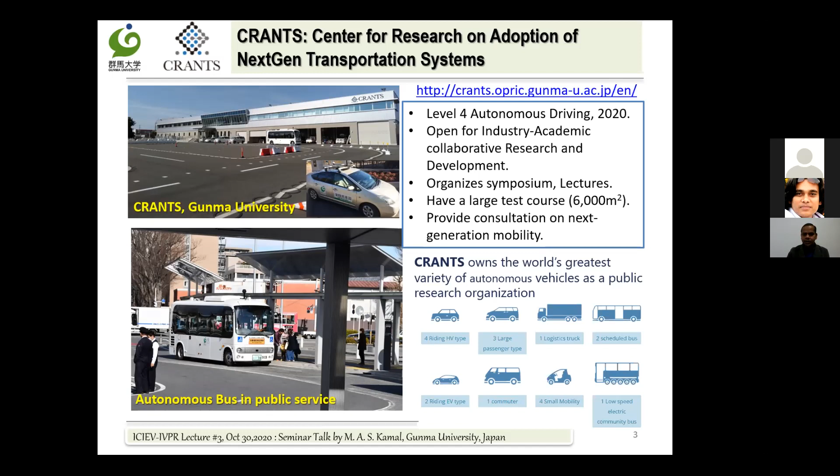And you see here, we are also having some pilot projects in different cities of Japan, where autonomous buses are transporting public people from one place to another in a real experiment service. So this is where I'm working. I joined Gunma University just 1.5 years ago, and I am collaborating with this center as well.

Anyhow, let's move to the main topic on transportation. What are the problems in our existing road transportation system? I have about 65 slides, so I pick up from here and there, but I will explain some parts for those who are interested to work in this area, and mainly some results, and finish my work in around 40-45 minutes. So anyhow, road transportation is a complex system.

Why a complex system? There are various independent elements, like each car is an element, a traffic signal is an element. If we see the road network, various types of vehicles and various types of behavior among the vehicles all make it very complex. We cannot model it, we cannot predict it perfectly. So this is a very complex system, and at this modern age of science, even we cannot prevent these kinds of problems: accidents, emission, extra cost of fuel consumption.

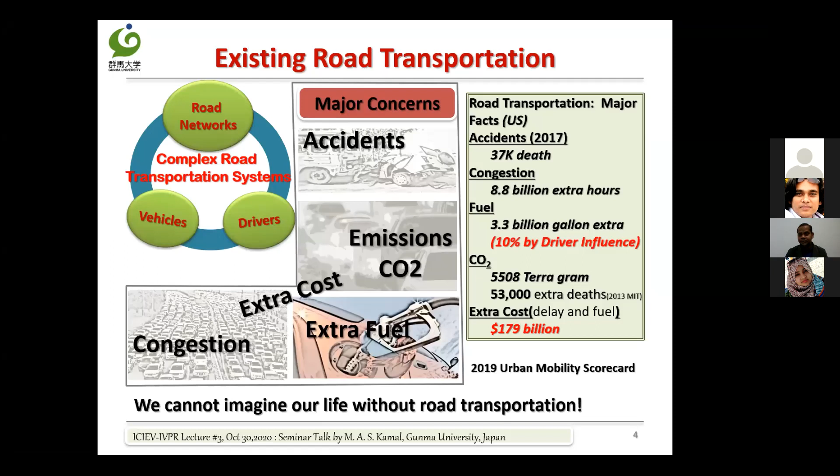So now, why can we not reduce these things, accidents, emission, or congestion? The problem is the human driver. Almost 100% of vehicles are controlled by human drivers, and they have limitations in sensing and reacting, and even some psychological factors. Some drivers want to drive aggressively, so it's not about limitation. I think this is the major reason we are having this problem. How can we overcome this? Researchers have been working on this field always, but so far not much improvement.

So let's see what intelligent transportation systems, ITS, are going to introduce that is new: the connected vehicle environment. The vehicles will communicate with each other so that they can share information with each other. This is called the connected vehicle environment. And autonomous driving vehicles. You see, this is one of the vehicles of my university.

So if the vehicles are autonomous, then it can decide on its own, more intelligently, and then we can have better transportation. However, with automated driving and connected vehicles, if you know the information of your surrounding vehicles, then how do you utilize it in an effective way so that the whole transportation system works as a single body and shows the collective optimal behavior

of the transportation? So if we can bring these three things, that means we are shifting the current paradigm into a new automated and connected paradigm. All vehicles will be connected, so we can realize congestion-free, utmost efficient transportation.

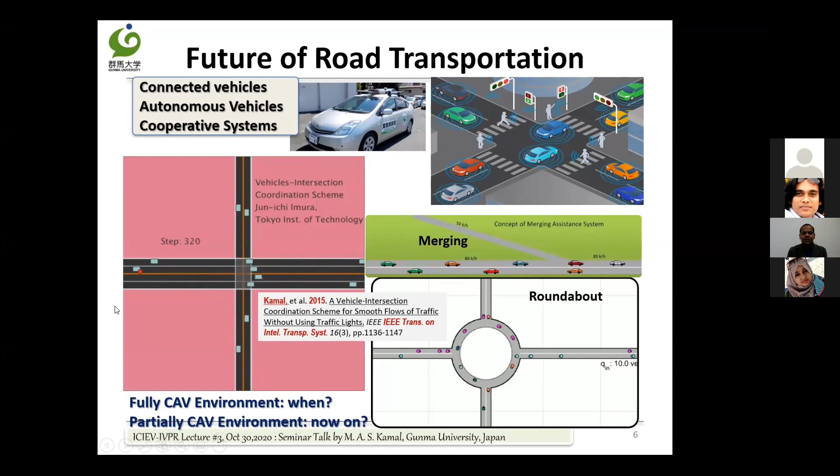So we can realize this is possible. We examined and proved this. What could be the maximum ceiling of advantage if we can realize this? How about merging? These are the source of traffic congestion in many countries that have a lot of highways. Roundabouts: some European countries and Malaysia have a lot of roundabouts. How can we optimize those things? If we can bring connectivity and automated vehicle technology, maybe we can realize these kinds of technology.

Another direction is cyber-physical systems. The world is moving not only on transport but toward an integrated system, the Society 5.0 and smart city concepts, and how we can come up with some new ideas. These will come in the future, but unless we think and come up with some proposal, some idea, some investigation, it will not be realized.

So how can we integrate all these things to link with transportation? Because without transportation, we cannot think of a society, a smart city, or even industry. So transport is the background. Even with IoT, we can use individual information, link it with transport and find some new ideas.

So I am presenting all these to you so that if you have a new idea, new thinking, you can think about it, or you can ask me more about this. I also expect that you will ask some critical questions to me. It will open my mind to new research as well. Okay, anyhow, let's move to my work.

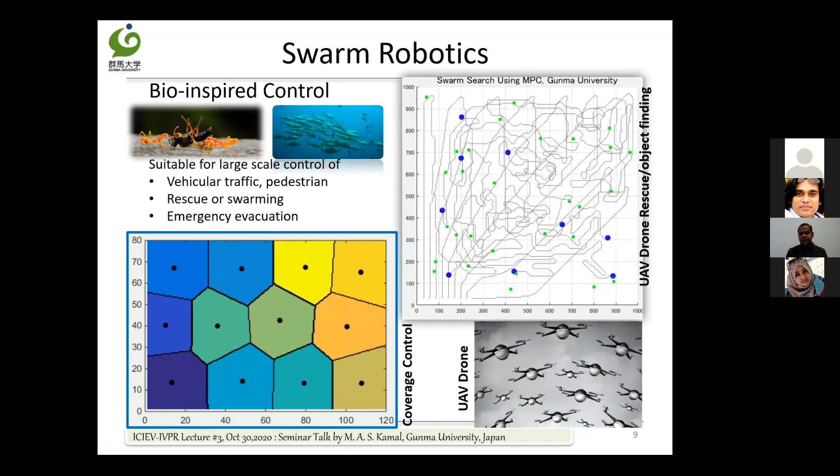Anyhow, I took a long time in my introduction.

So anyhow, in traffic control in the future, we can see two types of control. One is network level, maybe traffic signals. The other is vehicle control of the individual car: how we accelerate, brake, what the speed would be, turning left or right, lane change, those kinds of things. So here one is motion control, another is route selection.

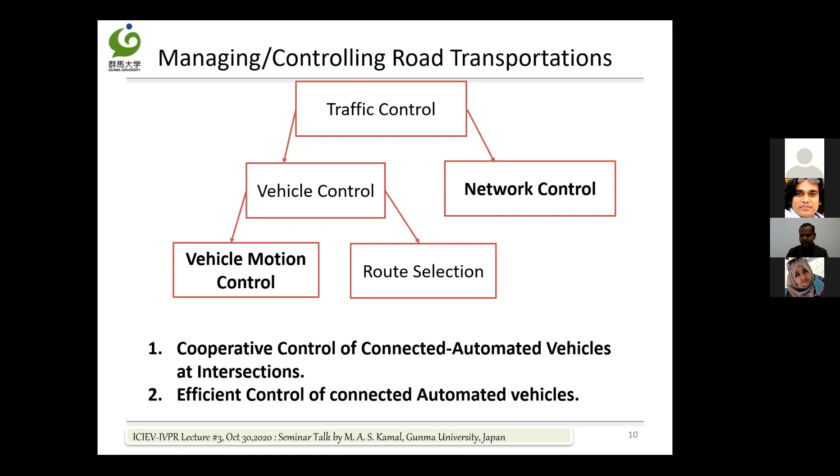Today I will present two series of my work, traffic network control and vehicle motion control, under these two topics: cooperative control of connected automated vehicles at intersections, and efficient control of connected automated vehicles. So let me go to the signalized intersection.

At a traffic intersection, the traffic light changes between red and green. Green gives the right of way for collision-free smooth crossing to some vehicles, but red to others causes inconvenience because those vehicles need to wait for long. It reduces capacity and increases inconvenience, fuel consumption, and emission. So this is the problem in signalized intersections. Even with 100% automated vehicles, unless we change this traffic signal, they also have to wait in the same way. So it's very inconvenient.

There are some characteristics that those who are new should understand. If all the vehicles are in a queue at a red signal, what happens when the signal changes from red to green? The first vehicle takes around 4 seconds to cross the intersection, because it has to start up from zero speed, then speed up, then move. But after a while, all the vehicles can move within about 2 seconds.

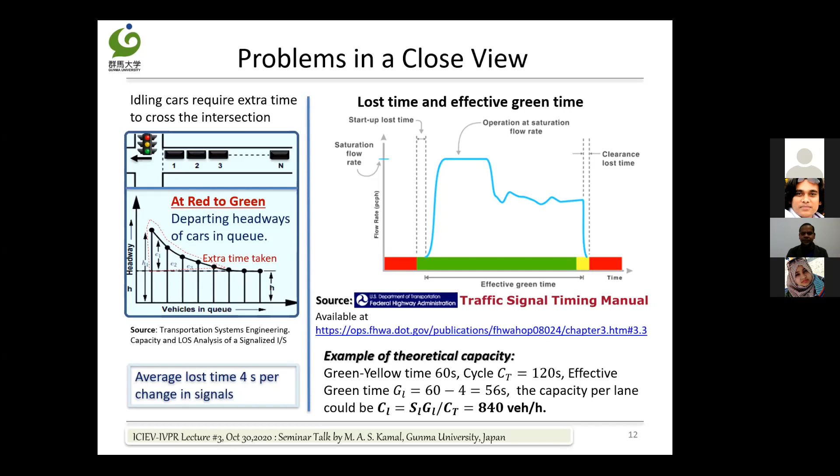So whenever there is a change in traffic signal, there is a loss of extra time. This is called extra lost time. In any green signal, at the first part and last part, there is no traffic flow in the intersection. So at every change there is about 4 seconds of time loss, and effective green time is reduced. If you change the signal very frequently, your capacity and effective green time will be low. That's why many intersections choose traffic cycles of 2 or 3 minutes, even longer.

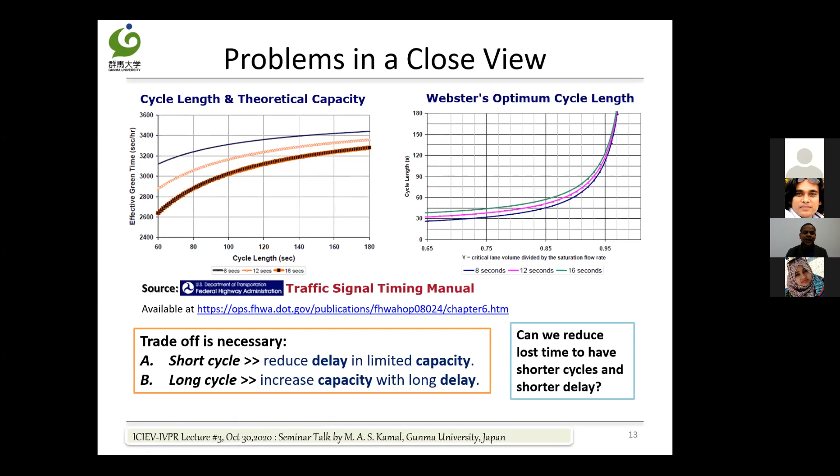You need a trade-off. If we make the traffic signal cycle short, we can reduce the delay, but it also reduces the capacity. We don't want that. If we make it long, we can have higher capacity, but traffic delay will be high. How can we have a solution with connected automated vehicles?

This is one idea. I will show 2 of my works. One is 100% connected automated vehicles, as I introduced at the beginning, and how we can realize those things. But 100% automated vehicles we may realize 50 years later, so meanwhile, what kinds of technology can we have? I will introduce that in case 2 of this research. Time is limited, so I'm going fast. So the idea is, we don't need a traffic signal.

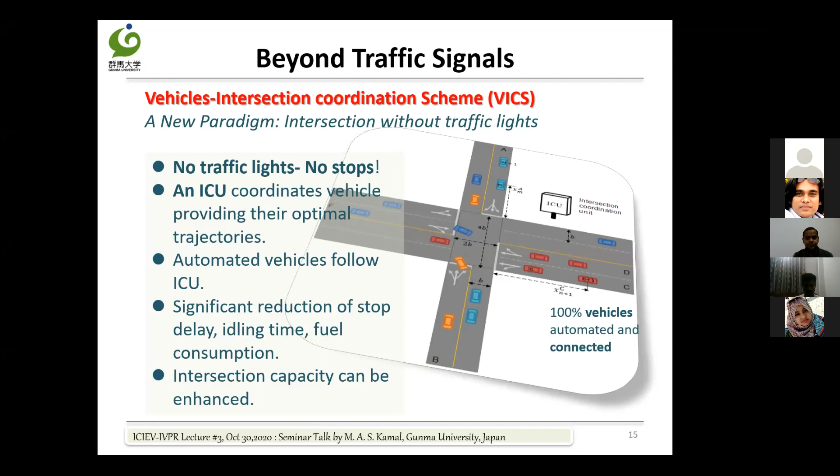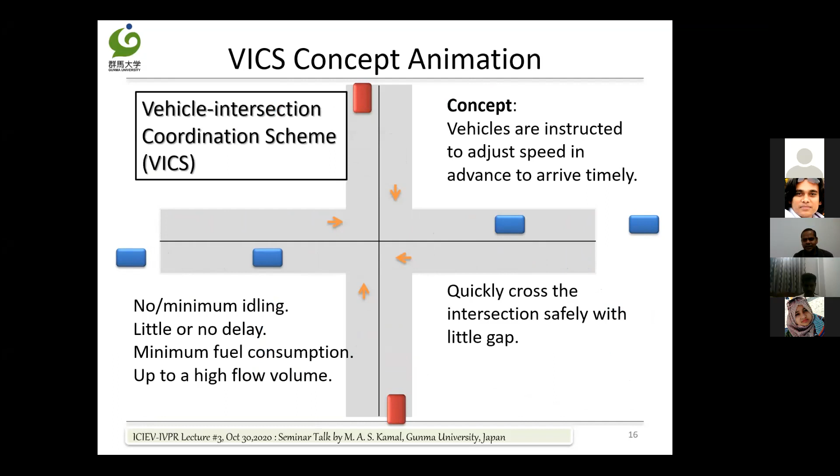All vehicles can communicate with the intersection coordination unit, and we have a supercomputer to compute what would be the best trajectory for all vehicles, best timing, and pass back to those vehicles using 5G technology or whatever future technology we have. So the idea is very simple, a very simple concept. Can we pass this car in this way? Then you don't have to wait at the intersection.

So this is the idea. Here I came up with an optimization concept: how we can optimize all these vehicles at the same time, so we ensure there is no collision. If two vehicles are crossing, this is the collision point, the center of the crossing point of their paths. If any one of these vehicles is outside of this circle, that means it is safe, no collision. But if both vehicles arrive within the circle at the same time, that means collision.

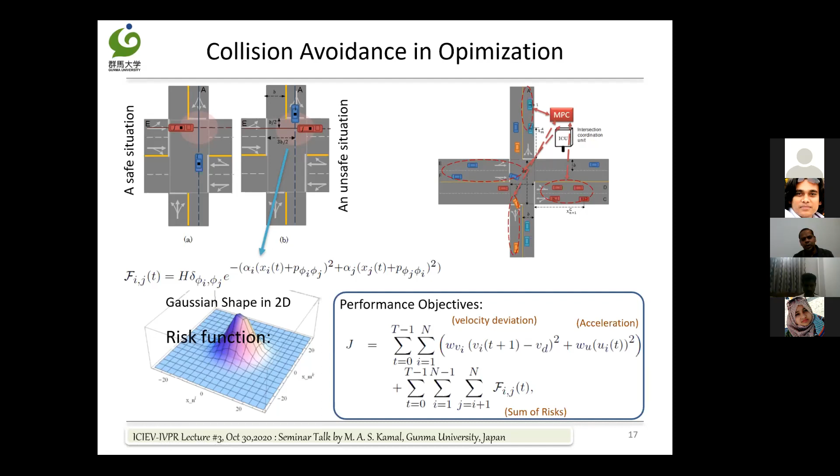So we developed a kind of risk function that indicates, depending on the position of two vehicles, whether there will be a collision or not. This is the main point. We also want to run all these vehicles at some desired speed and acceleration, considering the sum of risks of all vehicles. We consider two vehicles from each lane, compute their trajectory for maybe 10 seconds, 20 seconds, then execute for 0.5 seconds and repeat, like model predictive control, for their smooth crossing.

This is the result I have shown already. Some vehicles are blinking, which means they will turn left or right. And you see from very far, they are coming in such a way that they don't have to wait at this intersection. This work was published in 2014 in IEEE Transactions. You can find it in the reference I have given in this slide, or all these papers you can find in my Google Scholar, including the preprint versions.

So now let's see what kinds of advantages we have. In the normal case, say 50% of the time is green, 50% is red, and both sides have equal traffic volume. If we change the traffic volume per hour per lane, we look at the crossing time from 100 meters before the intersection. With a traditional traffic light, a maximum of maybe 850 vehicles can cross. If the traffic volume is more than that, some vehicles have to wait more than one cycle, so their crossing time increases up to the maximum limit.

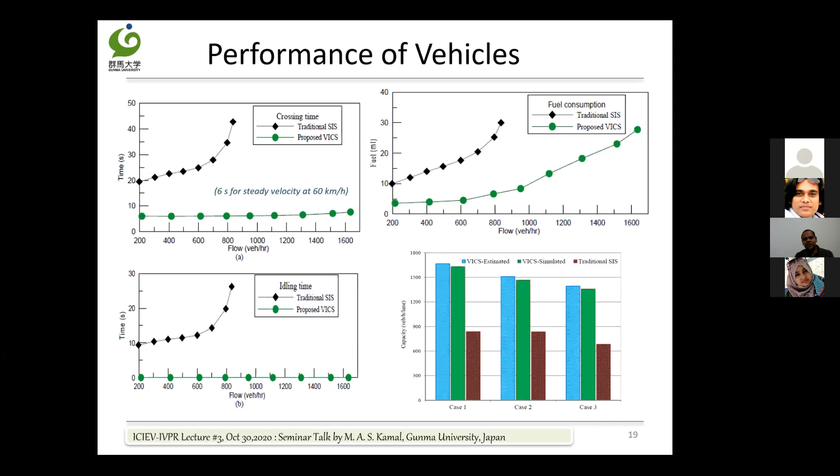But the question is whether you feel comfortable when your car is crossing the intersection just 2 or 3 meters from a car moving on the other side. Even if it's very smooth, the human driver may not feel comfortable. At the same time, if all vehicles are not connected and automated, we cannot realize this. How about a gradual implementation of an efficient driving system that can support automated cars at low penetration, and provide better support as the penetration of connected automated vehicles increases? So we target mixed automated and manual vehicles.

So I come up with the idea that the vehicles may not be 100% automated; they can be semi-automated as well. We don't know when they will come onto the road in high volume, but we expect that with 5G communication or other kinds of communication, all vehicles will be connected. In that case, consider the south and west links.

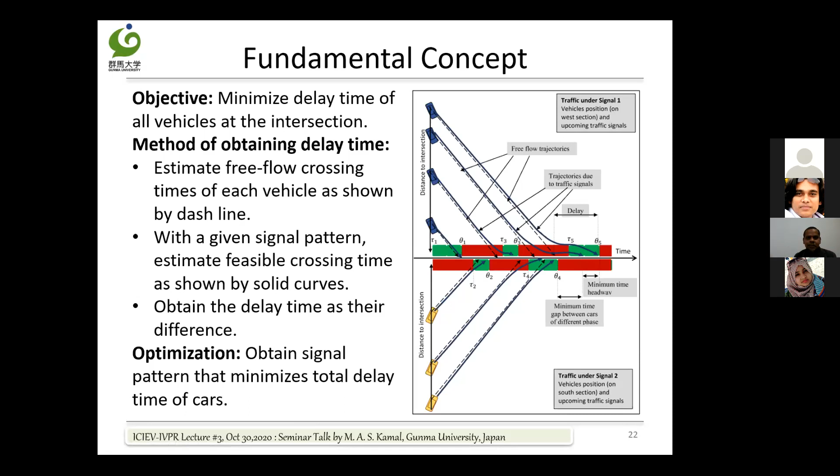Can we find an optimal pattern of these kinds of signals so that the total waiting time of all vehicles is minimum? At the same time, it will ensure the capacity of this intersection is higher than the traffic volume. This is the main idea of this work. I'm not discussing details, but I represent the signal mathematically, formulate the problem, and we optimize and estimate which vehicle can pass at which time.

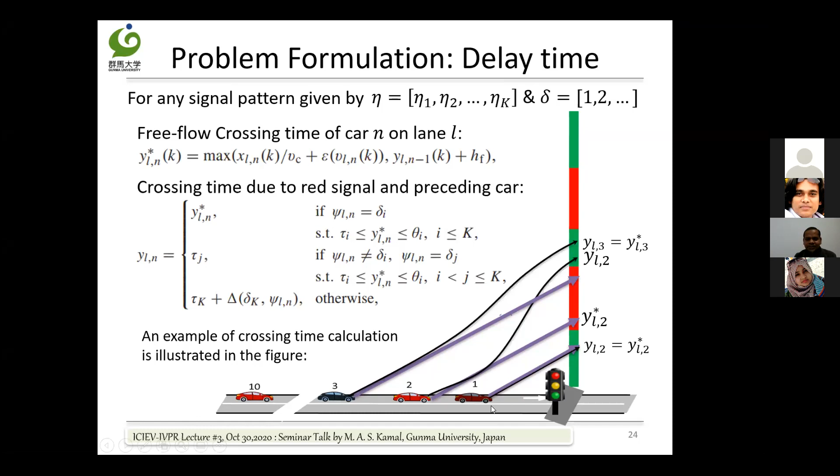If we change the traffic signal a little bit, we can understand how much their waiting time will change. So in that way, to reduce the waiting time, we can find the optimal traffic signal, of course considering all four directions, not only one direction. One direction is very easy, but four directions is difficult.

So I just take some snapshots and make this animation that you see. We generate very short traffic signals considering the traffic volume, and when there is no turning traffic, there is no turning signal. So in this way, we can see 50% automated vehicles can improve the traffic flow as well. This is the way we developed the simulator.

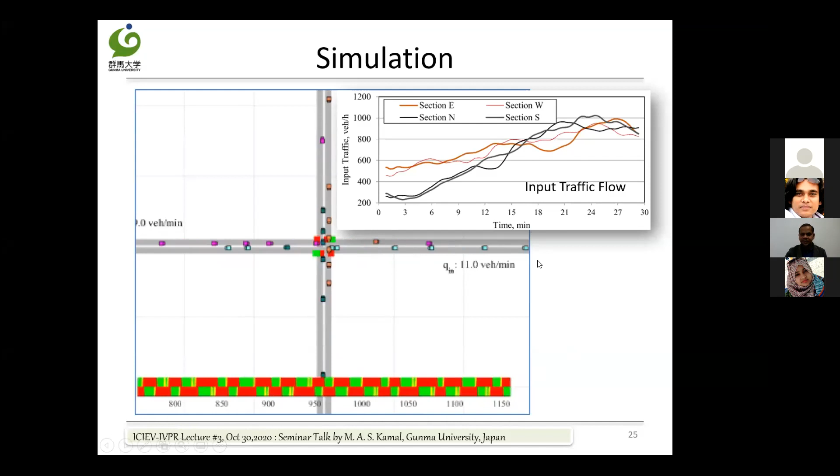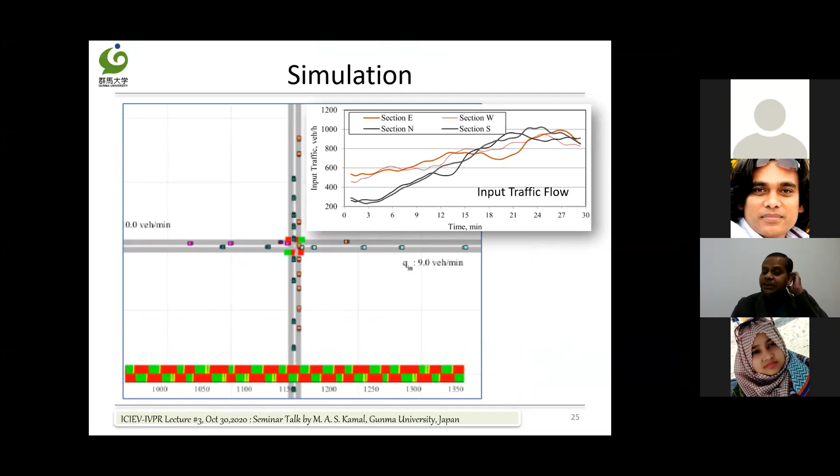So we gradually increase the traffic volume. When we increase the traffic volume, the traffic signal timing automatically increases dynamically, and we can see how our automated traffic signal system with connected vehicles works. As time passes, the traffic volume from four directions increases, and the signal duration also increases. So in this way, we proposed to change the signal dynamically.

Anyhow, you see traffic from two sides. These are the signals: 50% of vehicles are automated, and when they receive the traffic signal one cycle ahead, they slightly adjust their arrival time so that they don't need to wait. If we can ensure shorter traffic signal time, we can ensure it in that way.

So now, the existing best traffic signal control is called actuated traffic signal control. Even in Japan we don't have it everywhere, maybe very limited cases, because it's very expensive. You need to install loop detectors on the road and control the traffic in that way.

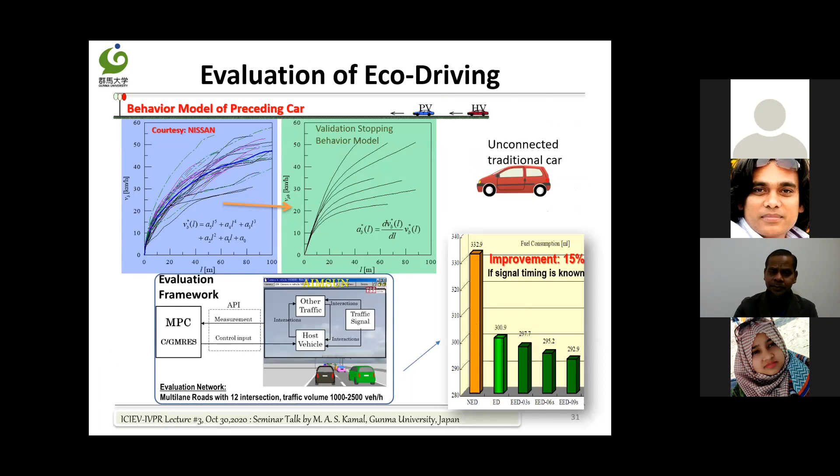Now I want to show another problem of eco driving using a YouTube video. I hope you can see it here. This is the shock wave - some vehicle becomes slow and the shock wave propagates backward. You can see some vehicles slow down in this highway.

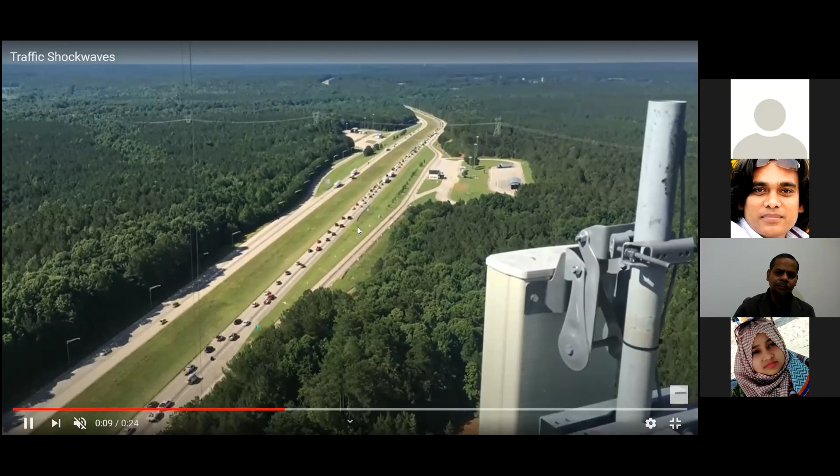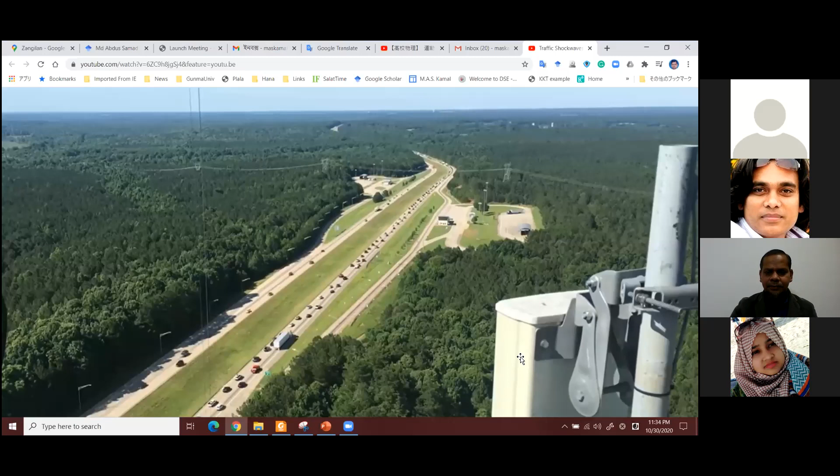This is the shock wave, called shock wave. The stop-and-go situation happens because of the driving behavior of human drivers.

There are some experiments as well. Here you see in the circular path, vehicles are asked to maintain a 30-meter gap and drive at constant speed. However, because of human driver nature, some vehicles become congested while others are free flow. This is called shock wave creation, and it is one of the reasons for traffic congestion.

So now we need to think beyond eco driving - how can we have better driving if we have connectivity? You know the fundamental diagram of traffic flow. Those studying civil engineering know that in transportation systems, traffic density refers to how many vehicles are in one kilometer.

When density is very low, even if speed is high, traffic volume is low. As traffic density increases, traffic flow volume (vehicles per hour) increases. However, there is a maximum point called the traffic critical density. After that, traffic congestion happens and speed drops. But even though this is maximum capacity, we cannot operate our road transportation at this level - maybe only 85%, because this is called the meta-stable region where traffic shock waves happen, as I showed.

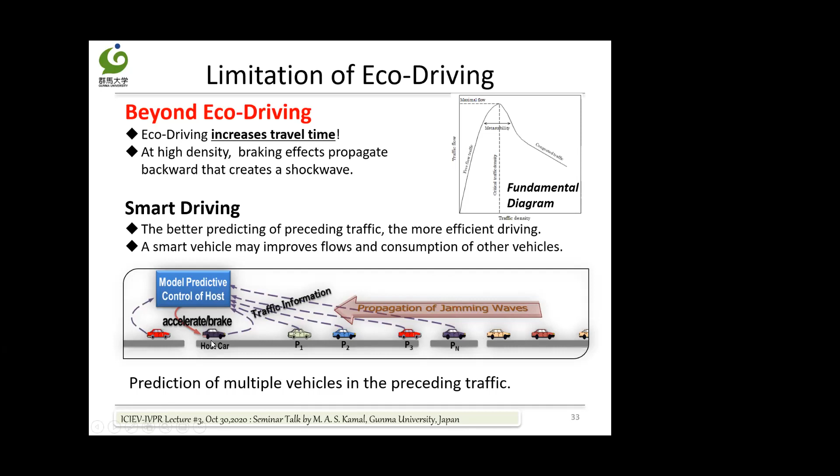So now the idea is smart driving. This is my car - if I have information on all these 4 cars in front of me, maybe 5 or 10 cars, and if we know this information in advance, we can take early action. Let's see in a similar way what we can develop.

This is the problem formulation - I'm not going to explain these things in detail. Here, this simulation is in a circular path, a real experiment I realized, I developed this model and ran it. You see all these vehicles running at constant speed, constant gap on the highway. This is the density and speed.

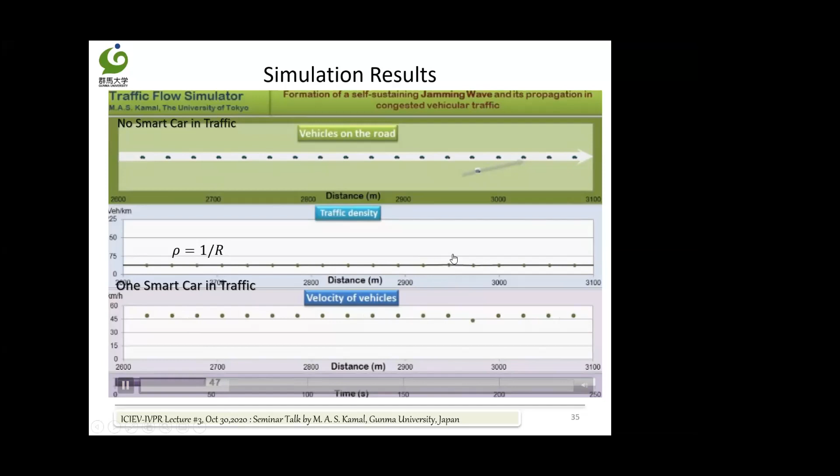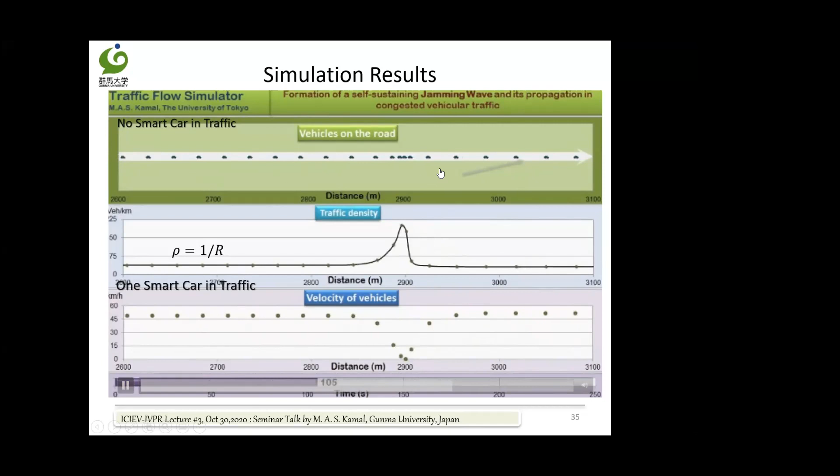You see one vehicle entering here. What happens at critical density? It creates a traffic jam and propagates backward. If it propagates backward, that means it creates congestion. This is the traditional driving case.

How about my smart driving? I propose here - this is my smart driving. I know the information of all these human-driven vehicles, shown by the dotted line. In the same situation, congestion starts happening - you see the speed drops here.

With smart driving, whenever my vehicle sees these vehicles reduce speed, it also adjusts its speed and gap - increasing the gap and reducing speed so that the traffic jam cannot pass behind. So it alleviates the traffic congestion. This is called smart driving.

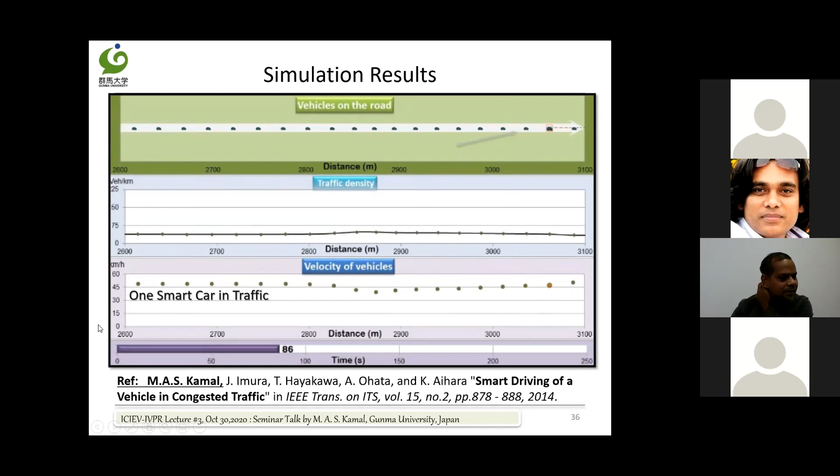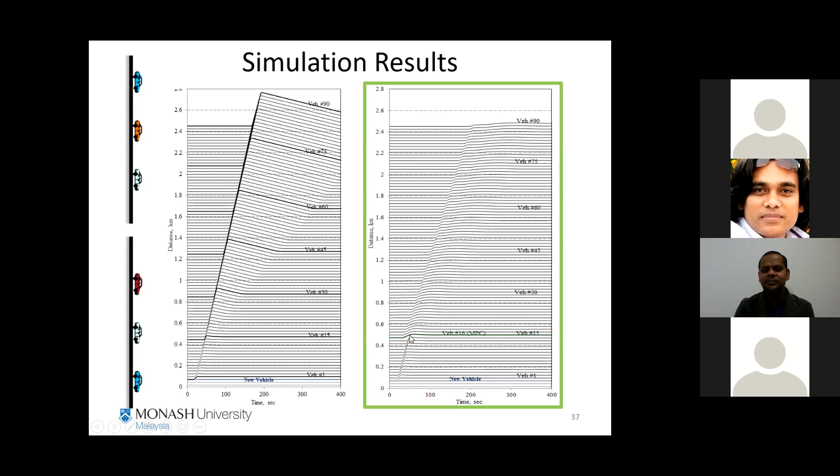This is the plot - if I plot this situation as a relative trajectory, some vehicle enters and a shockwave happens. When we introduce a smart car, only one car at the early stage of the shock wave, it can alleviate the shock wave.

Anyhow, that was for a single lane road. How about multiple lane roads? I worked at Toyota R&D and developed this - it's also patented under Toyota. Let me introduce this one.

Here is my host car, and these are the surrounding vehicles. If I know the information of all these vehicles, then I have the freedom to change lanes early to keep the flow smoother. So in this traffic model, we need efficiency, we need a cost function, we want to ensure safe merging with no collision, and also a safe gap between vehicles in the same lane.

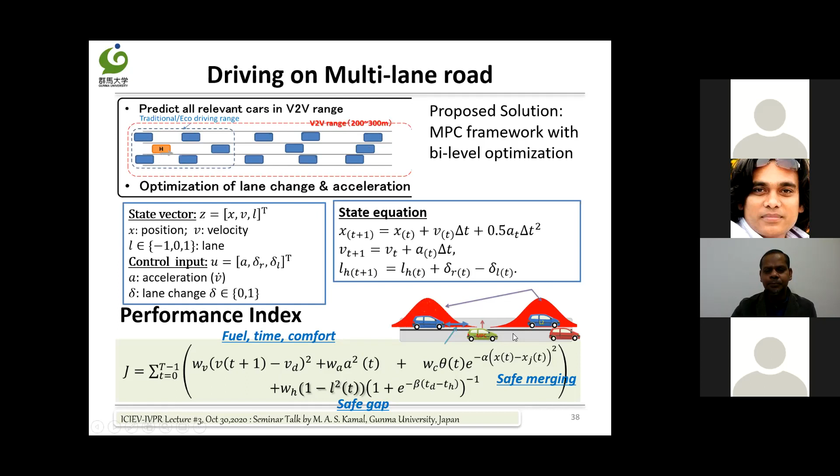So what I did, this is my car, and I decide using the optimization process whether I should continue running at the same lane, or should I change the lane, and what would be the perfect place to change the lane. So I calculate this for the next 20 seconds, then every 0.1 second, 0.5 second, I repeat this optimization, like model predictive control. You see, this is one example.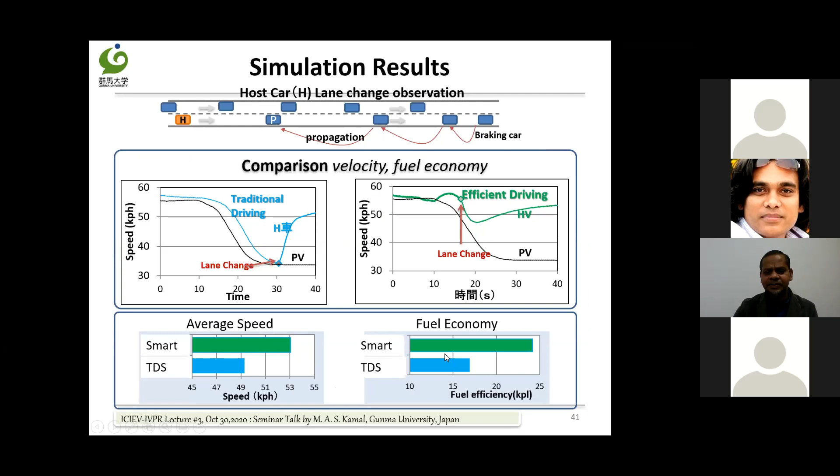This is the case of autonomous or traditional car. These vehicles slow down, and what happens? It propagates backward later. My automated car can understand that whenever this car becomes slow, it can understand what is going to happen, and it speeds up and changes the lane. The traditional human vehicles still wait when its front car slows down, then it tries to lane change. With this simple comparison, you see the average speed and fuel economy can be improved significantly.

Now we introduce these kinds of vehicles in large scale in the traffic, in the merging road on the highway. You see, when 100% are traditional vehicles, these kinds of traffic jams happen. Now you see the pink car, and for the same situation here, the pink car is controlled by the model predictive control, our developed method. By this control effort, some of the vehicles adjust their speed wisely, looking at the information the next 100, 200 meters, or make a lane change, and it can improve the traffic flow here.

Significantly, you see in the case of 100% traditional vehicles, each vehicle - this is kilometer per hour, and this axis shows kilometer per liter. Higher is better for each vehicle, but however, you see some vehicles have to stop. But when we introduce 50% of this smart car, you see the whole transportation, most of these vehicles, even those that are not automated, improve their performance.

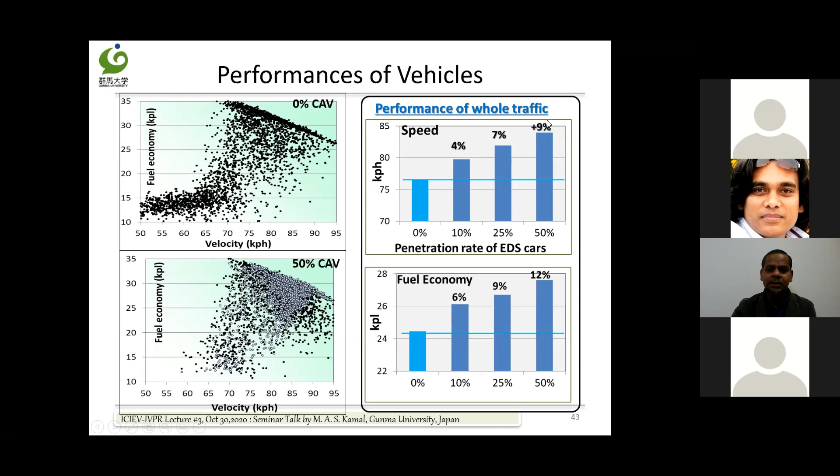If you see here, we observe the different percentage of the vehicles, autonomous vehicles in the traffic, and what are the improvements in average speed or average fuel economy.

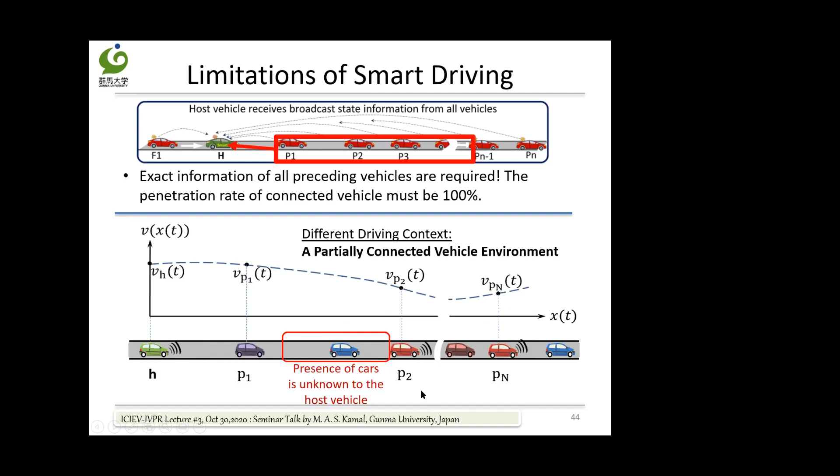So how can we realize the same thing? I came up with a new concept, a completely new idea. It's called road speed profile. It's published in Transactions on Vehicular Technology, so you can have a look.

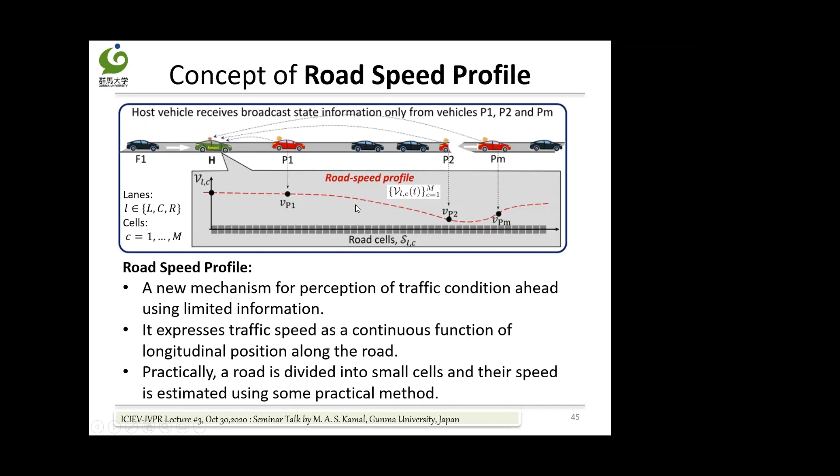So even when we know the information of few vehicles, we estimate, we learn some way to find what would be the road speed profile - even when we don't know the information. If there were any car here, its speed would be like this - we estimate it in this way. I'm not explaining the mathematical derivation and other things. So this is my road speed profile.

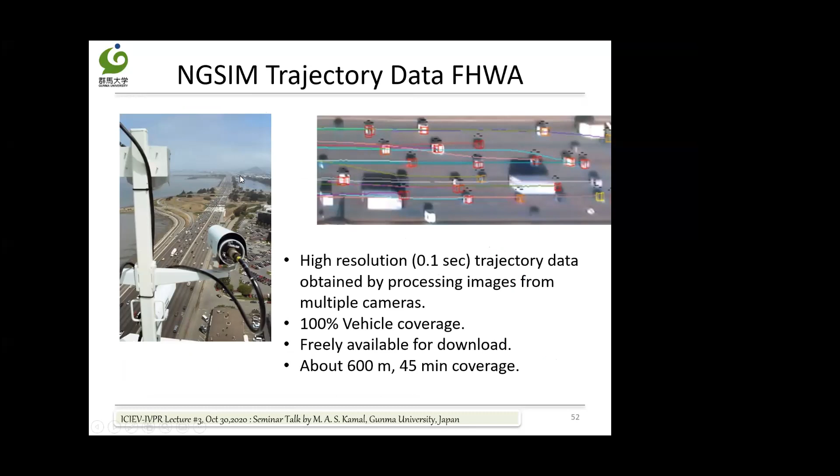For evaluation, I took the NGSIM trajectory data provided by the Federal Highway Administration of the US. This open source data has been used for various studies in the world, so I took this data. These data were collected from near Hollywood. This is the highway, a 5-lane highway. They collected the data for 45 minutes, all these vehicles.

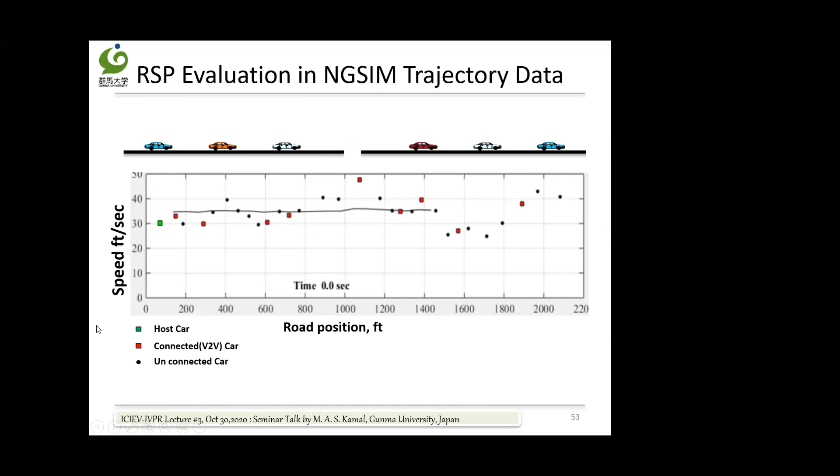I show some data here. You see, I pick up some cars along the road. This US data is all in feet and feet per second for the speed. You see, this is the x-axis data, and I plot some of the vehicle data, speed data along this path - x and speed here. This marker shows the speed of individual vehicles. The green one, I use this mark.

This is my host car that estimates the road speed profile. The red one - we know the information only from this red car's speed. The black dots, the speed of the vehicles not known to the host vehicle. So it starts estimating this road speed profile, this initial value.

So what happens, you see, as long as these vehicles are moving forward, my car, from this limited vehicle-to-vehicle information, can at least understand there is a shock wave. Even if the shape is not accurate, no problem.

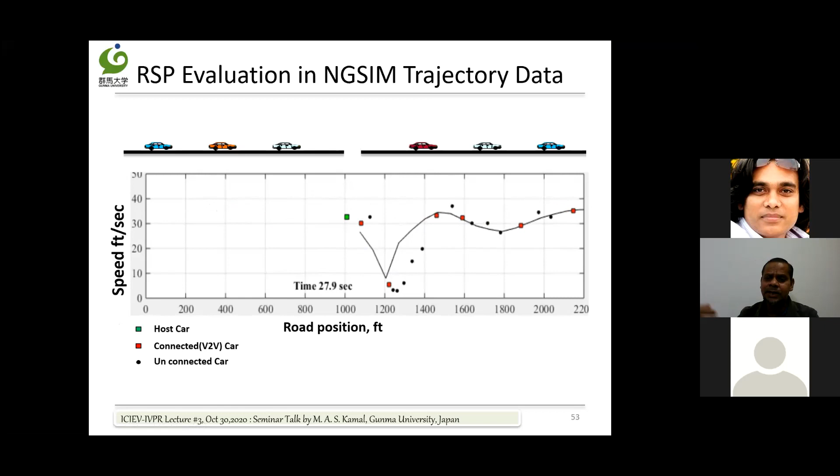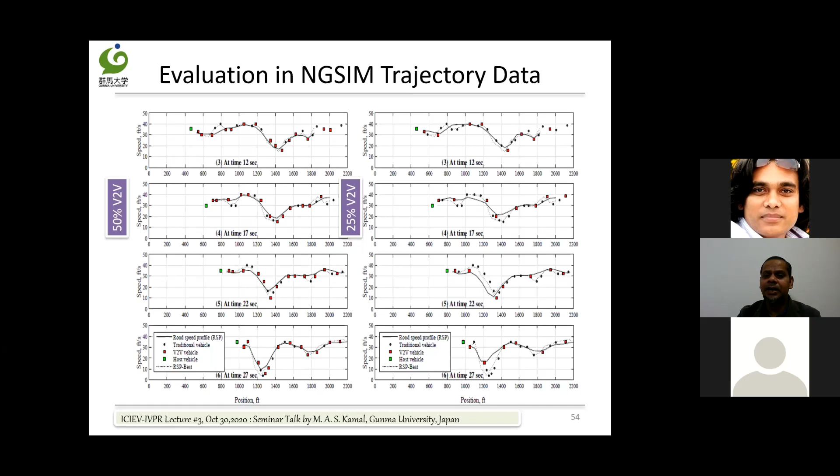If you have the speed drop, you can make a decision, adjust your speed or something. Even with 50% or 25% V2V vehicle-to-vehicle communication, we can see the host vehicle can predict the traffic flow speed profile in the next 100, 200 meters in a better way, improving the driving behavior of these vehicles, even with some packet losses in data communication.

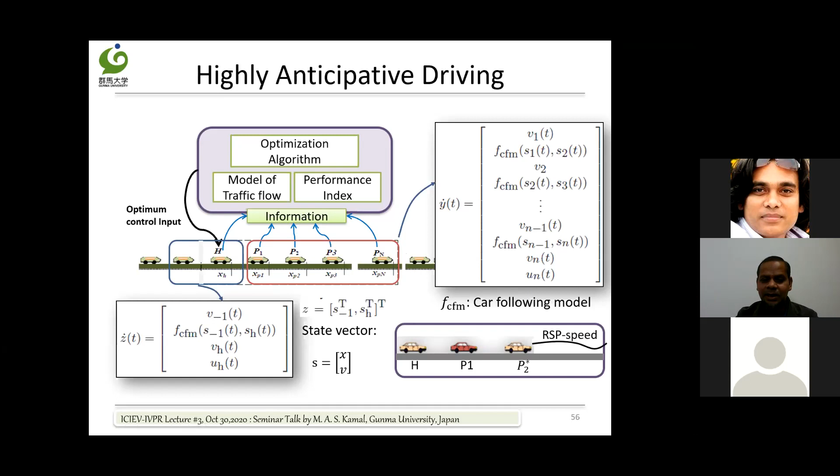Even with 50% losses, the speed RMS error is not much significant. It still works well, even better than the current case where we don't have information of cars beyond the immediate one. The smart vehicle I proposed, instead of considering all information from all vehicles, just uses the road speed profile to predict my immediate preceding vehicle, and I get similar results to the case of 100% automated vehicles.

I am almost in the last stage, so this is the last topic, and this is under review in IEEE Transactions. I'm not going into much detail.

You see, if we have multi-lane road speed profile and smart driving, how can we define smart driving? This is my term for why we say smart - I am not thinking about only myself. I want to improve my behavior so it will help others improve their driving performance.

Some part of the road is congested and all vehicles want to change lanes because the road is blocked or something happens. When all these vehicles try to make a lane change at the same point, the same place, it becomes a crowd. Like a crowd of people - sometimes a stampede happens and people die because when everyone wants to enter somewhere, it creates congestion.

So how can we create a traffic state so that everyone can smoothly cross the lane, and can we use this road speed profile to provide that kind of information? I am not showing those details here.

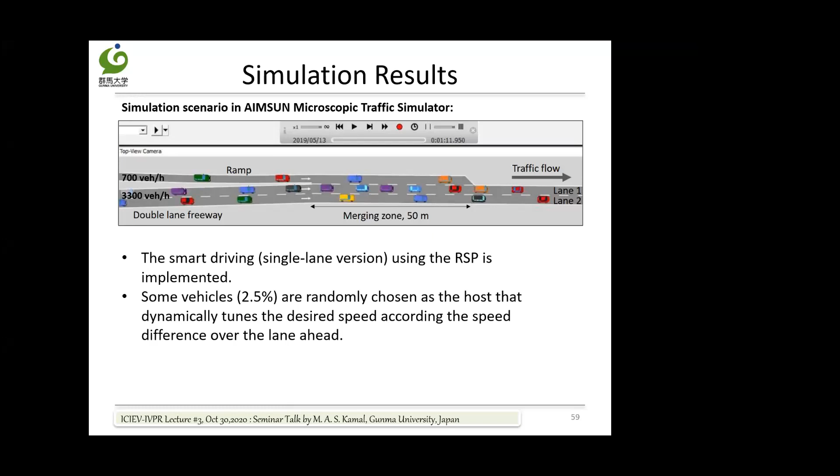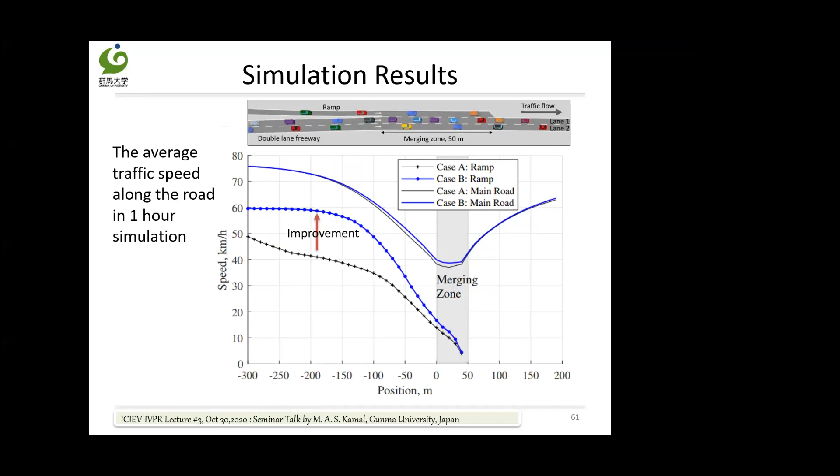Over the lanes, lane 1 and lane 2 should have similar traffic speed. If not, the smart car will try to help achieve the same speed, which facilitates other vehicles to smoothly change lanes and improves traffic flow significantly, as we see in this result.

So these are the overall statistics - only 5%, or even 2.5% of vehicles, can improve traffic significantly. This is how connected vehicles and automated vehicles, perhaps implemented via cloud computing, and various other ways, can improve traffic flow.

So I must go to the conclusion now. Connected vehicles bring opportunities, but at the same time challenges - how we can deal with huge amounts of data online in a fraction of a second, then process it and show the best way to improve traffic flow. This is the challenge for our research community.

We should come up with some new ideas - any idea, I think everyone knows about this, you can come up with one. We need to innovate the technology to have a fully congestion-free, efficient, sustainable transportation system. You want to go from place A to B without having to stop anywhere - can we come up with these kinds of solutions in the future, for a smart society?

That is my objective, and I believe this will be the future of the road transportation system. We can come up with and develop these kinds of things.

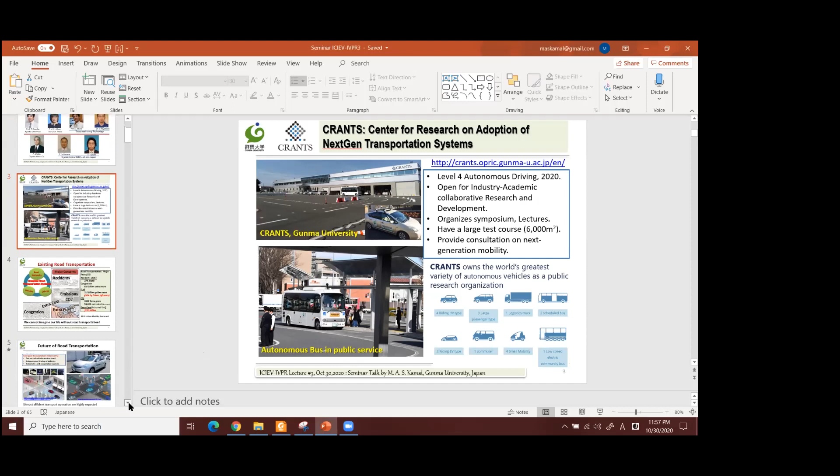So the next question is from Jahangir Hussain. Salam sir, if the ICU fails anyhow, an accident may occur. How did you take precautions for this if there is no way to manually control in an emergency, or is this still being developed? I will be happy to know about this.

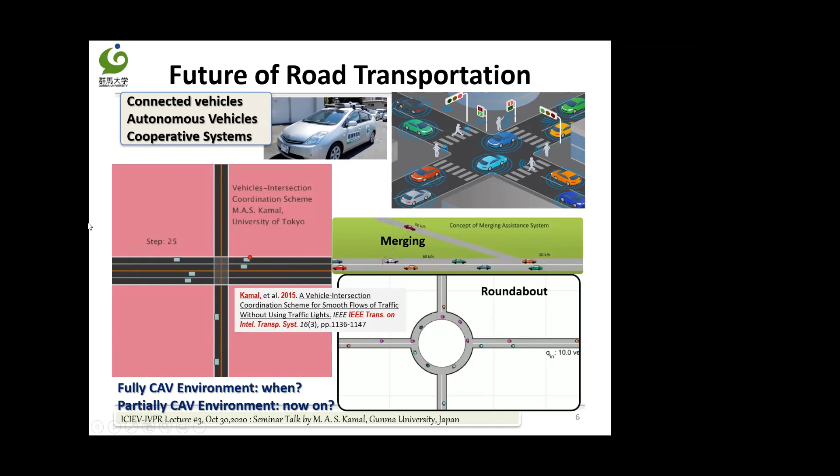So I think you are talking about these kinds of sudden situations at the intersection. You see, all these vehicles, I am calculating every 0.5 seconds. Although I am planning for 20-second model predictive control, 20 seconds ahead, maybe I'm predicting some vehicles and I don't know whether they actually move in that way. If there are some changes in 0.5 seconds or a fraction of a second, I repeat this thing. Whenever there are some changes, I repeat it, and it can work well.

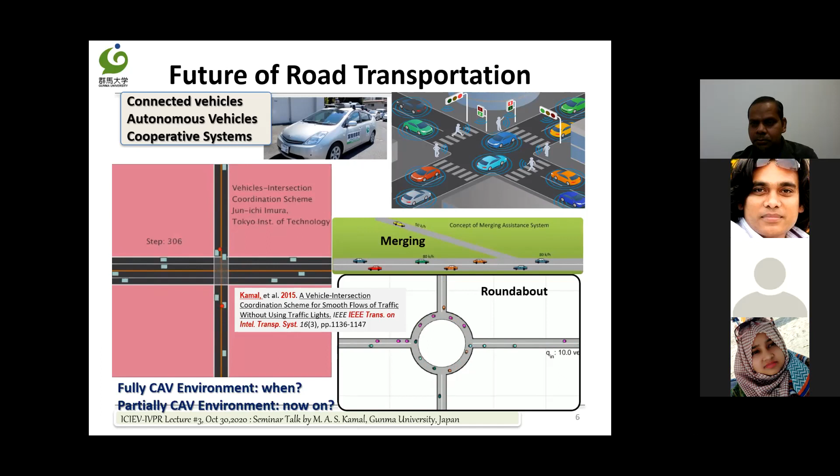But the thing is, if the ICU fails, what happens? Individual vehicles have to slow down. Of course, they are taking the surrounding vehicles into account; they know each other. Your front vehicle has higher priority; you cannot hit it. So if you are driving, you cannot hit your front car. Even if the front car slows down, you must slow down. So these kinds of driving algorithms are there.

But if the ICU fails, what happens? On the road in Japan as well, when there is a big cyclone, the traffic signal is gone, no traffic light, and it creates congestion. The same thing will happen.

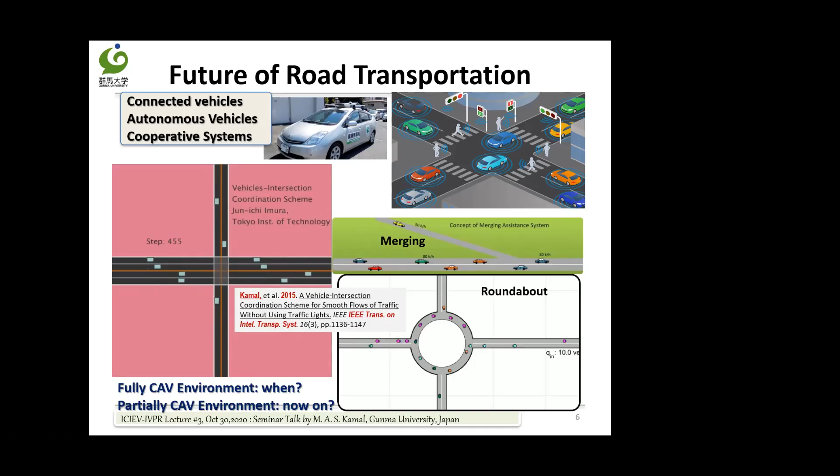Questions. So I have a question: how much scope is there for reinforcement learning in your work? Because you mentioned that you worked on that before. So this is number one. And number two, is there any available data that young researchers can explore based on this? Can you give some pointers?

Okay, I know the community of ICIEV and IVPR, most are from the pattern recognition and image processing field. If you talk about data, some people are working on data, but data means existing traffic data. Existing traffic data you can use for finding traffic congestion or finding the route in the current condition. There are some kinds of data, but in my research I don't want data of the current system. Maybe just for prediction; we need to come up with new technology that can improve the traffic flow.

That's why we don't have those kinds of data to work with, but you can start working on how a vehicle follows other vehicles, a simple model. You can understand how a human driver drives a car using simulation. Then you introduce cars; there are some open source programs. Even I have a simple developed simulator using MATLAB. So you can start working with these things and come up with your algorithm.

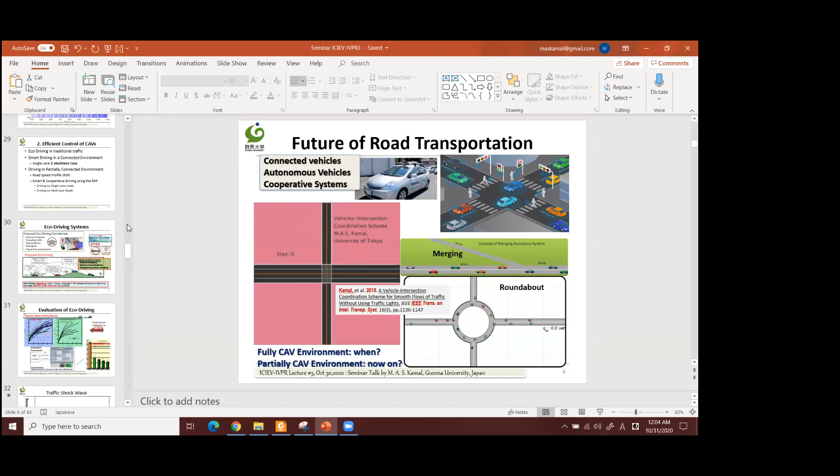So can you tell us about the best known method for predicting future velocity or acceleration of preceding vehicles? Okay, this is the most challenging thing. In the model predictive control I'm working on, the most important thing is you must predict your vehicles, how they move. So in eco driving, I consider the current speed and current acceleration, and I just consider it will continue a few seconds in the same pattern.

This is one way. Some researchers, until my work, just considered they will move at a constant speed or something. Then I found that when a preceding vehicle is running steadily, maybe 50 km/h, but 200 meters ahead there is a red signal, it's still running steadily. I know it will stop at the red signal, but what would be the pattern? So then I developed some model using real driving data. This is another way.

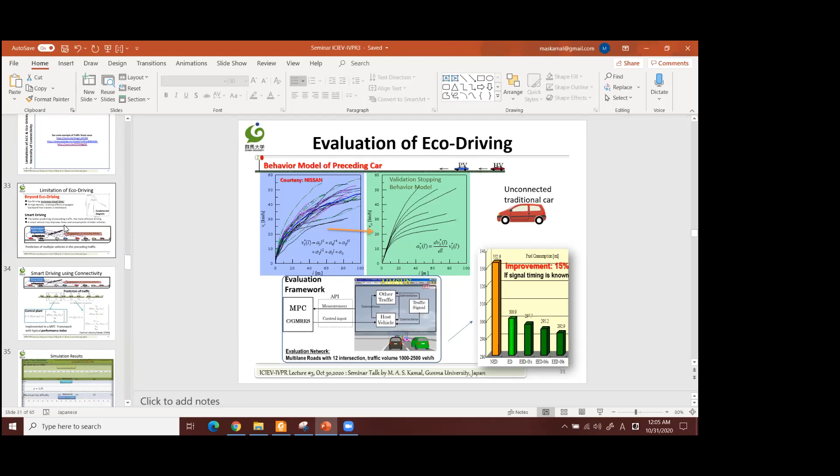Again, I want to predict my preceding vehicles. Here, if we know the information of all these cars, then using a car following model, I find the interaction between these cars. By iterating them, I can find what would be the behavior of the immediate preceding car. It gives better results, of course, because I know these vehicles. When they are running at a steady speed, we can predict in that way: when some vehicles are moving, they will move a few seconds the same way.

We just consider if it's rainy every day, maybe the next day will also be rainy. This is called persistent prediction, a concept used in weather forecasting. My professor asked me to utilize this idea. From the front car, I don't know what the car in its front is doing, so I use this persistent prediction. That's why we need connectivity to predict our vehicles in a better way. I'm not sure whether you are happy with this answer.